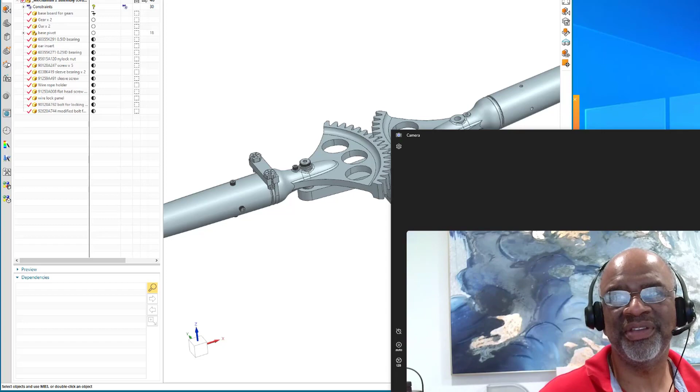In our previous video, we showed you the mechanism, and the mechanism looks like this. I emulated the water that's inside. I did the extract region command, extracted the region, closed it and sewed it up, then did an analysis measure with associativity on, so I had an actual variable for the internal volume and assigned the mass properties to it.

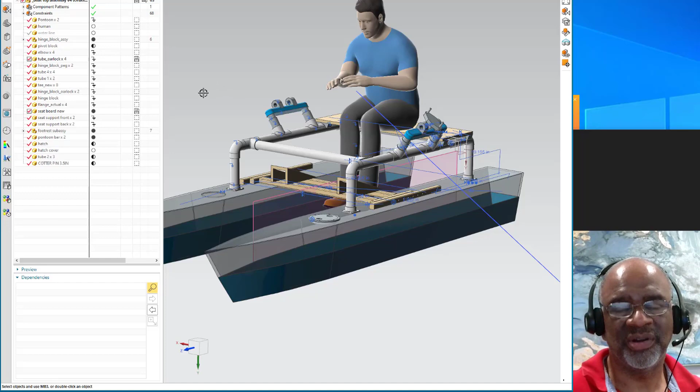Right now, with the current displacement, you can see this waterline. Each one of these pontoons holds 150 pounds.

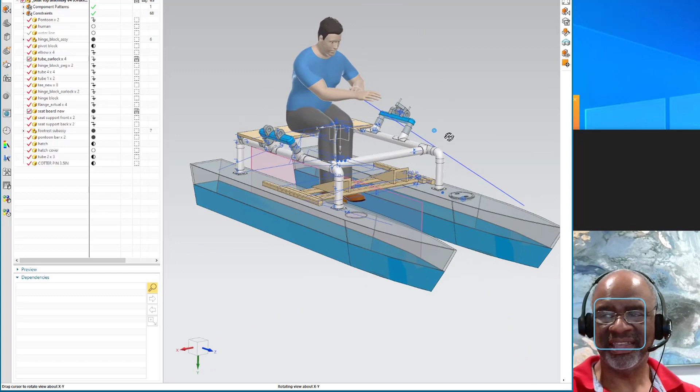Now we decided to really demonstrate this whole idea by building ourselves a boat. I can't wait to try it out. Now, I am a swimmer, and hopefully when we demonstrate this boat, I don't have to use those skills.

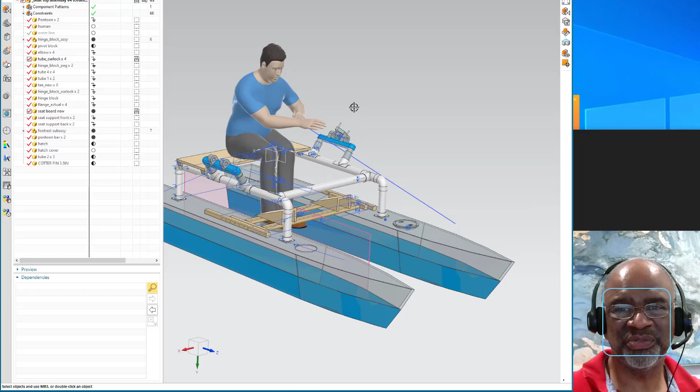Now we started building the actual pontoons, and we're building this structure. We printed out some gears with nylon, so this is the second installment of the forward-facing rower, and we're going to hopefully finish in the next week or so, and then we'll have a demonstration.

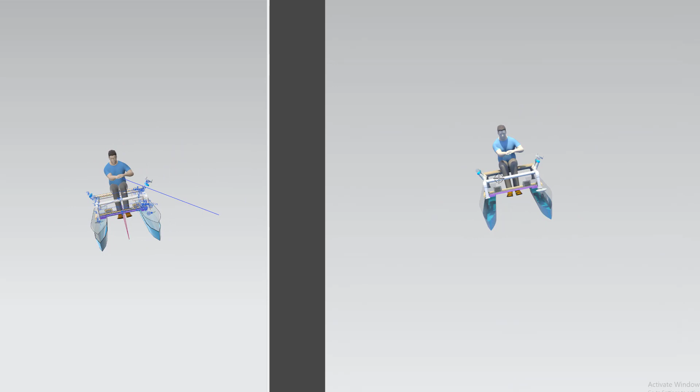The very next phase of this is to create a full-size and honest-to-goodness model. We're going to make the boat as well, and we're going to see this in action. I'm very excited, and as you can see, this is a continuation of everything that we've been doing thus far.

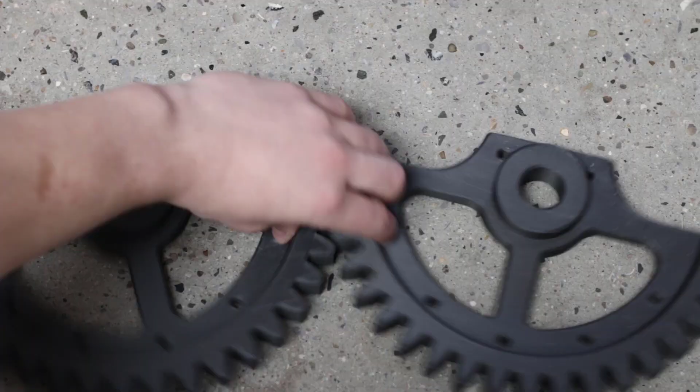Before, we showed you guys the version of these two gears, and they were much smaller because we had 3D printed them on a smaller machine. These here are a set of one of two pairs, and they work really well. They should be pretty strong, about 9-inch diameter, and these will be on the actual boat. Hopefully these will do what we want them to do.